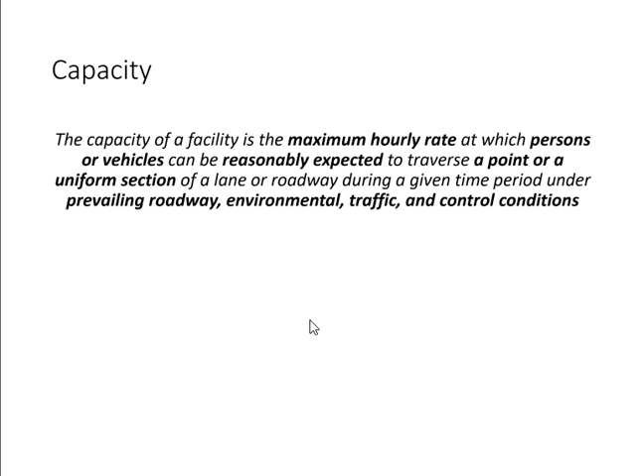See, now it works. Now it knows I'm from Pakistan. No use. No rest at all. Okay.

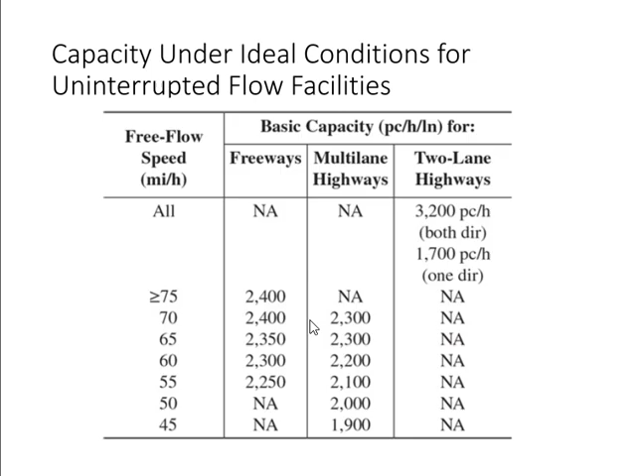We started the topic of level of service and capacity last time, and we discussed that we follow the Highway Capacity Manual for these analyses, and we also discussed the official definition of capacity according to the manual, and we looked at these values, which are the values of capacity under ideal conditions. So now move on to the concept of level of service. Okay.

Now we know traffic does not behave in the same way when the volume changes, right? If the volume is 100 and the volume is 2000, will the traffic flow be same in both cases? 100 and 2000, different, right? So the nature of traffic here is different and here it is completely different. Does it change only between these two extreme values? Meaning, if the traffic flow is 100, will it remain the same until 1999 and only change at 2000? It will keep on changing, right?

So it is something at 100, something else at 500. Now the condition of traffic at 500 is not the same as 100, and it is also not the same as 2000. So there are different conditions of traffic, different states of traffic flow. These states or conditions are represented with level of service. So what is the level of service? A condition of traffic under a given value of volume. When the volume will be this much, traffic will behave like this. So this is represented with a level of service, LOS.

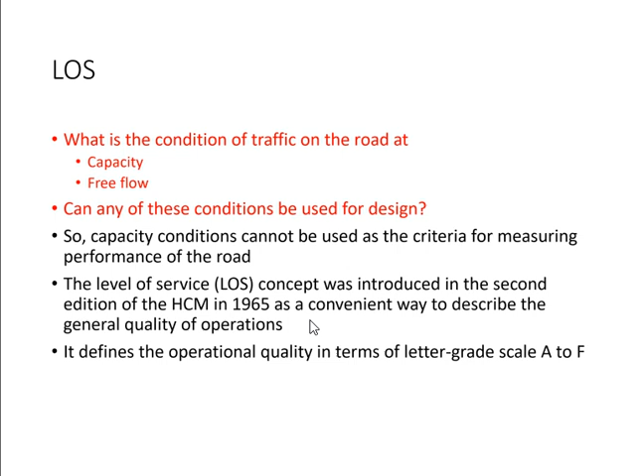So this is the official definition of level of service in the Highway Capacity Manual. The first sentence I already mentioned to you: quality of traffic flow, quality of traffic operation under a given value of flow. When the flow is this much, the quality of traffic will be this. Or the quality of operating conditions. Operating means how the traffic is moving. So the condition of movement of traffic under a given value of flow. And it's a qualitative measure.

It's a quality measure. There are 2 types of measures: quality and quantity. If I ask you about the weather today, and you tell me the temperature is this much, you give me a number, right? Is that quality or quantity?

Quantity, right? There's a number. Okay? If I ask you about the weather and you say it's very hot today, is it quality or quantity? Quality. You get the point now? Okay. Now, why do we need a quality measure for traffic? Why do we need level of service?

Did we discuss any quantity measures for traffic earlier? In the earlier topics, did we discuss any quantity measures of traffic? Yes. We discussed, right? The data. For example, the demand, the volume, the capacity. All of these are what? Numbers, right? They are all quantities. We discussed speed, travel time, delay. All of them are what? Quality or quantity?

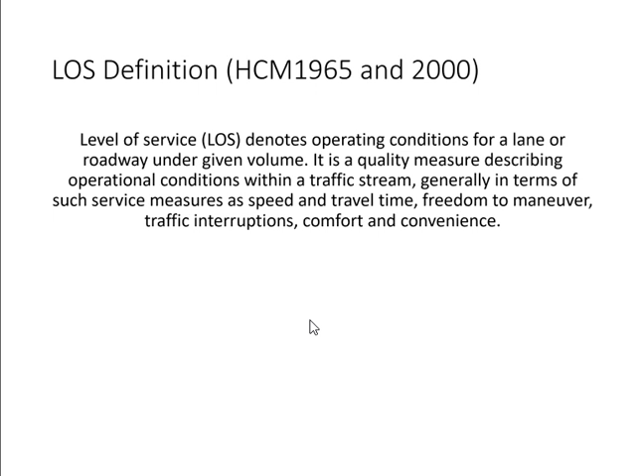Now, freedom for who? Driver. Convenience for who? Driver. Comfort for who? So you see, things related to drivers are difficult to measure. That's why we need the concept of level of service, because drivers are dictating how the traffic will move. So that's why.

There's a difference between them. Sustainable means continuous, without stopping, without any interruption. When you reach capacity, it's completely full, there is no margin for it. So because of driver actions, the flow does not remain sustainable. In E, the flow is maximum, yes, but it is not continuous. A driver changes the lane, everybody stops because there is no gap for him. We are at capacity.

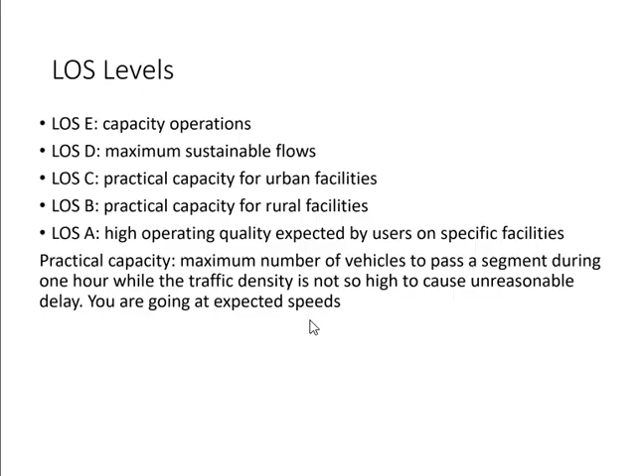So in rural areas, the change in speed happens early with less flow. In urban areas, it happens later, because of the expectation of the driver. Got it? Clear? One more thing, capacity is, yeah, this is what I mentioned. Okay, so,

Level of service is a quality measure. So it's a letter, like your grades. You get it as a letter: A, B and C. So can I say, A for you, B for you, C for you, D for you? Can I do that? Yes or no? Everybody agrees I can do it, right? Remember that. Nobody comes to me after this.

But no. To give you the B or the A, I must have a score. That score is a value, not a letter. It's a number: the number is this much, your grade is this. Same thing happens with level of service. To find out the level of service, I need a value, and that value is called the service measure. Service measure is the value which tells you the level of service.

Now, we are discussing uninterrupted flow facilities. We will discuss three of them: multi-lane highways, freeways, and two-lane highways. For multi-lane highways and freeways, the value which we need for finding out level of service is density. Somebody asks you for level of service, you would ask him what is the density. Give me the value of density, I'll give you the level of service.

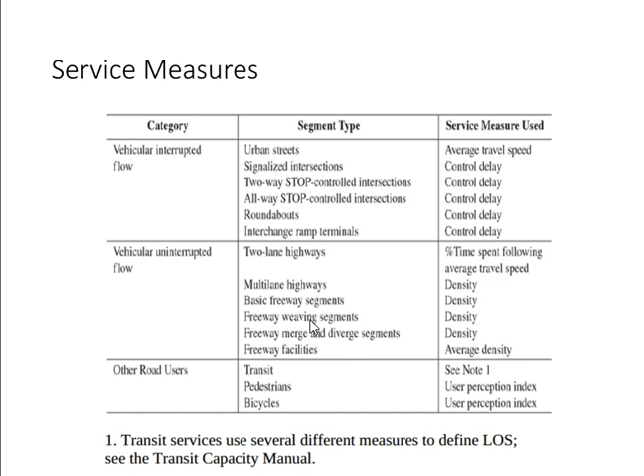But the point you need to keep in mind is that the service measures, the values for level of service of these facilities which are not used by vehicles, do not depend upon traffic data. So if I ask you for level of service of a pedestrian bridge, you will not ask me for density and speed and volume and flow. Got it? Clear? Okay.

Now we said level of service changes according to what? What makes the traffic change? Flow, right? So level of service is changing according to the condition of traffic, and the condition of traffic depends upon flow rate. So every level of service has a maximum value of flow rate. That value is called the service flow rate. So service flow rate is the maximum flow rate for a particular level of service.

Let us take the first one. First one is A, right? Now if I say the service flow rate for A is 500, until you reach 500, you are in A. When you cross 500, you are somewhere else, not A. So from 0 to 500 it's A. Now let's say service flow rate for B is 700. Until you reach 500, you are in which level of service? A. After you cross 500, until you reach 700, you are in B. Got it? Clear?

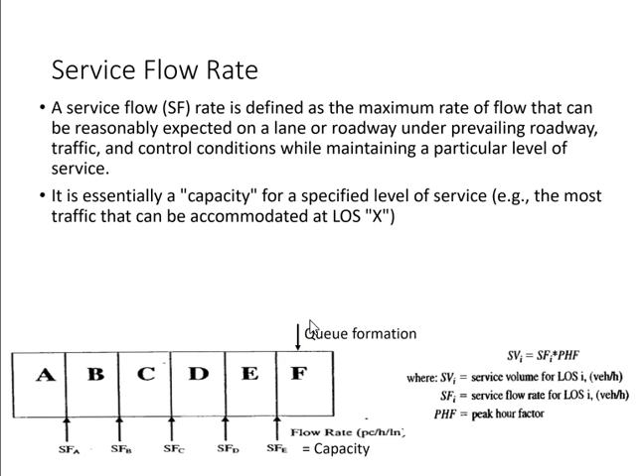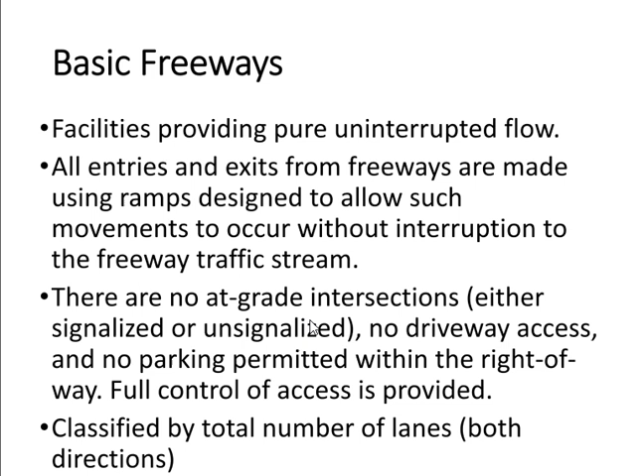In this chapter we will discuss freeways and multilane highways together. What's the reason? I will come back to it. Freeways don't have intersections. Freeways have medians, and at least 2 lanes in each direction, which means at least how many total? 4. So freeways don't have intersections, and have a median and at least 2 lanes in each direction, or at least 4 total lanes. So everything is fixed. There are no intersections, the median is there, so you only need to know the number of lanes.

Multi-lane highways have intersections, but to call them uninterrupted, the intersections must be more than 2 miles apart. If they are less than 2 miles, you cannot discuss them here. So to have multi-lane highways as uninterrupted, the intersections must be more than 2 miles apart. Multi-lane highways may or may not have a median. If they have a median, we call them divided.

If they don't have a median, we call them undivided. Okay, but the third condition is the same, that 2 lanes or more in each direction. Okay, so multilane highways may have intersections, but to make them uninterrupted, the intersections must be more than 2 miles apart. Okay, they may or may not have a median. With median, divided; without median, undivided. And the last thing is number of lanes: at least 4 total.

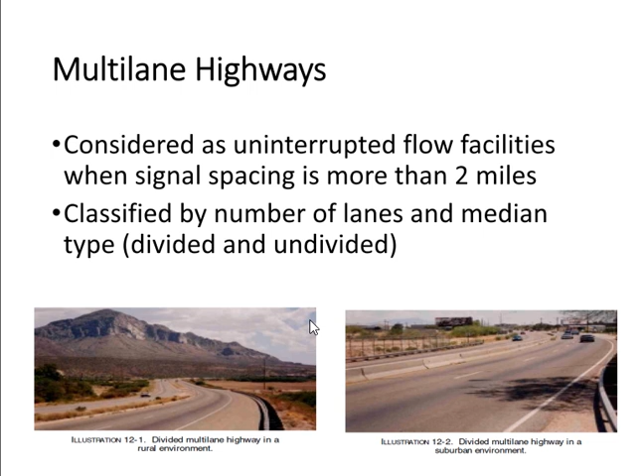Now, I mentioned this point here, right? After which the speed decreases. For both of them, this point is around 1000, or at least 1000. So speed reduction for both these highways starts to happen after 1000 passenger cars per hour. Okay, so these are the things in which they are the same.

Another thing which makes them similar is the base condition, meaning ideal conditions. I mentioned the base or ideal condition in yesterday's lecture as well, when I was showing you the capacity. Capacity was in what terms? Anyone? Look at the first sentence here. No heavy vehicles. The first base condition is no heavy vehicles. So all vehicles are what then? Cars. All vehicles are passenger cars.

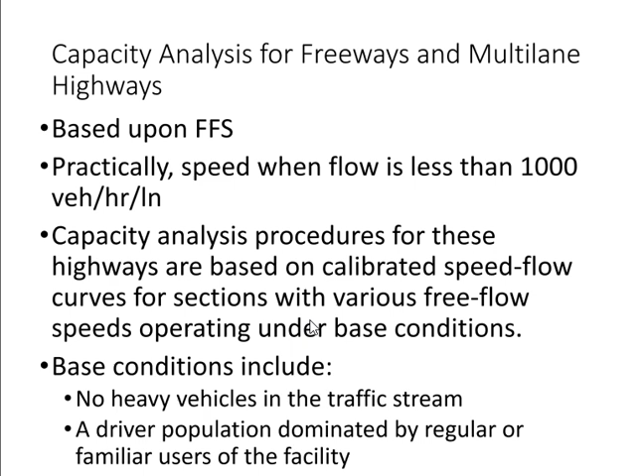A small description of each level of service. Level of service A means you have complete free flow. You are not bothered about other drivers. You select your own speed. Something is problematic with your car, you want to change the lane, you can do it easily. You want to go to the shoulder because the car stopped, so now you have to get out and push your car towards the shoulder. It happens, right?

This will not affect the other drivers because they have enough gap available to go to the other lane without any stoppage. So in level of service A, the gap is very long. Even if the lane is blocked, you have enough space on the other lane. And to give you an idea about the spacing, the average spacing in this condition is about 480 feet.

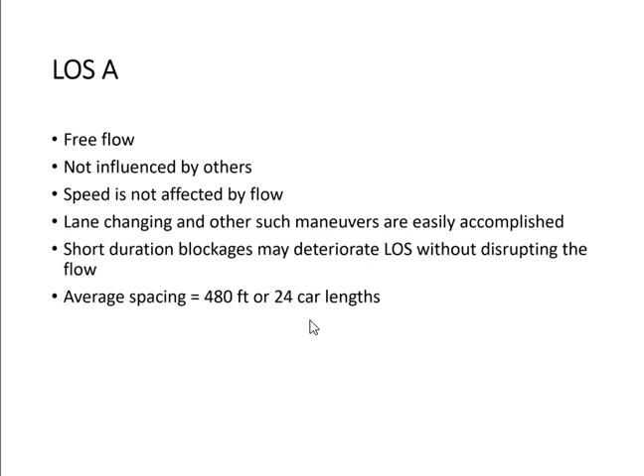Level of service B, more cars. You see more cars in front of you. The spacing is less, so you are now more careful.

But obviously you still live in Bahrain, so you feel like you're a Formula 1 driver, going straight to the track.

So you see more cars, you see lesser spacing, but it does not affect your speed. Only your mental carefulness has increased. Your driving behavior is still the same, same speed. There are still gaps available in the other lane. If an accident happens, the car breaks down, or you forgot you were taking a turn and want to change the lane, you can do it easily without any stopping. But the spacing is less. It was 400 something, now it is almost 300.

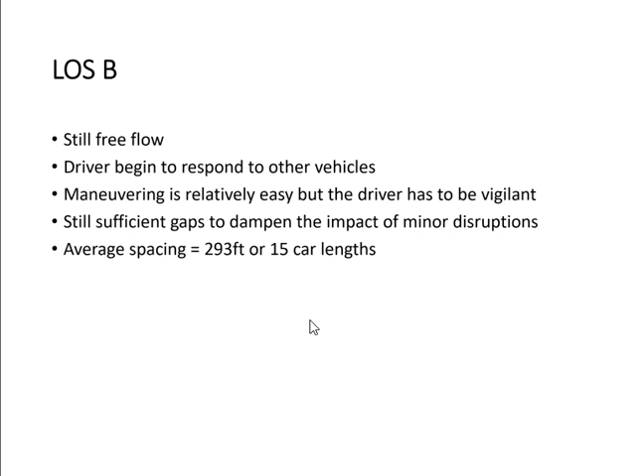Level of service C, more cars means less spacing. So from 293 to 203. Spacing is becoming less, but we are still in the free-flow mode. We are still going at the same speed.

Because the gap is less, you have to be more careful with high speed. Now the gaps are less, so there's a chance that when you decide to change your lane, you don't find the gap. The gaps are becoming less and less now, so there's a chance that you may disrupt other drivers. You may cause them to stop.

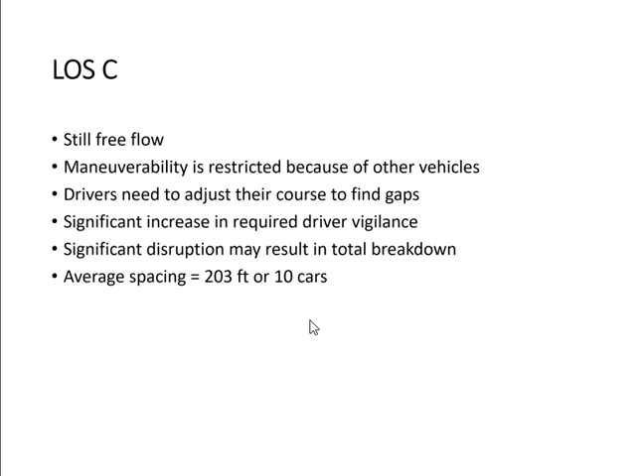But as far as you are driving in your own lane, you feel that you can maintain your speed. Here, from level of service D, the change is not only in the driver's mind. The change is now coming into traffic as well, in terms of speed. From A, B to C, the change was only in spacing or the gaps. Here, the change in gap is so much that it is changing the driver speed as well. So in level of service D, you start to see a major change in driver speed. Got it?

So obviously, that also means the gaps are less, and there is a very high chance that you will disrupt other drivers. For changing the lane, or because you are looking at a board and have to slow down to read the date of the offer, from 25 March to 26 March, something like this. This may disturb the other drivers now because they don't have the gap. They are slowing down because of it. The gap is now around 150 feet.

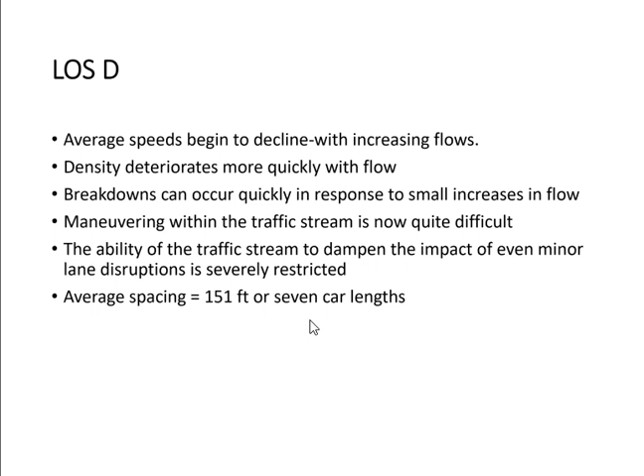And then we have level of service E, which we said is capacity. Capacity means what? I gave the idea: the whole room is full of chairs. If I have to move here, I can do it, because this is my space. But if I have to go to the door, I have to move the chairs. Same thing on the road. You are moving in your lane, no problem. But now it's very full, so there is no gap. You decide to change the lane or somebody decides to change the lane, you have to stop. There is no other way.

That's why it is not sustainable. This is not continuous because there is literally no gap. It's not like the gap is less; there is no gap at all. That's why we call it capacity. So in this case, even normal lane changes will cause a stoppage in flow. That's why they are never continuous, because drivers need to do other things. And if they are not continuous, anything that happens, a car broke down, an accident, will definitely cause a traffic jam. The spacing is now around 100 feet or so.

Now you may say 100 feet means 30 meters, which is good enough for a car. How long is a car, you know? How many meters? 2 point something meters. No, this is long. 3.6? Good. Like from front to back, how much? You are giving me side to side. I'm saying the other dimension. Almost double.